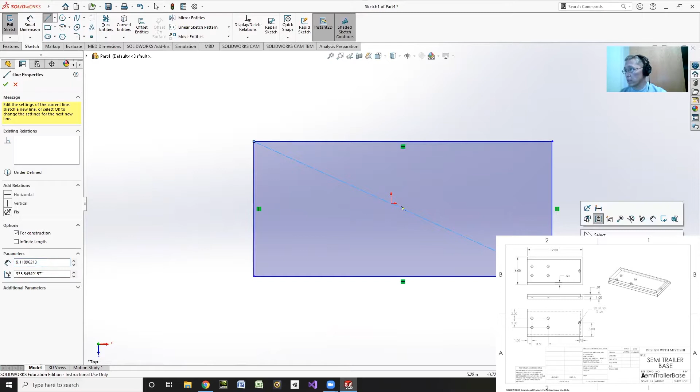Coincident with the corners there. Add a relation between the center line and the origin to midpoint. Hit OK, smart dimension. Dimension this guy here is 6 inches, and this guy here is going to be 12 inches.

Now what we're going to do is go to features, extrude boss base. We're going to extrude this a whole inch, 1 inch, and hit OK. Now I can do this a couple different ways, so I'm going to do it kind of an interesting way.

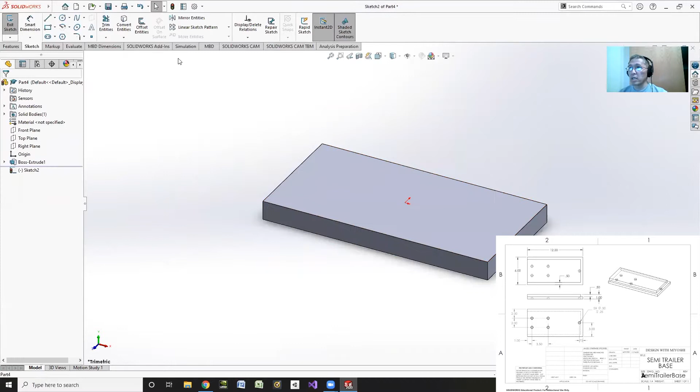We'll do sketch, and I want to put the sketch on the top face. So I'll click on the face, and then I'll just do offset entities. When you do offset entities, I'll do it 0.5, half an inch. When you offset an entity, all you have to do is grab the face, or if you want to...

Actually, we're not going to grab the whole face. We want to grab this edge, and this edge, and this edge. Now notice it put it on the outside. You can just click on reverse, and that flips where it's at, and we'll hit OK.

Now what we're going to do is cut extrude that. So we'll extrude a cut, and we want to grab either that sketch, which is great, but we don't want to go down the whole way - that would be kind of silly. So we're just going to change this distance to 0.5.

If you clicked on it right now, it would cut out the middle. Well, that's not what we want. So I'm going to right click, and we're going to add the feature. Instead of cutting out the inside, we want to flip the side to cut and cut the outside edge. So now you can see it's going to cut out the outside edge. We've got this nice little edge there to work with.

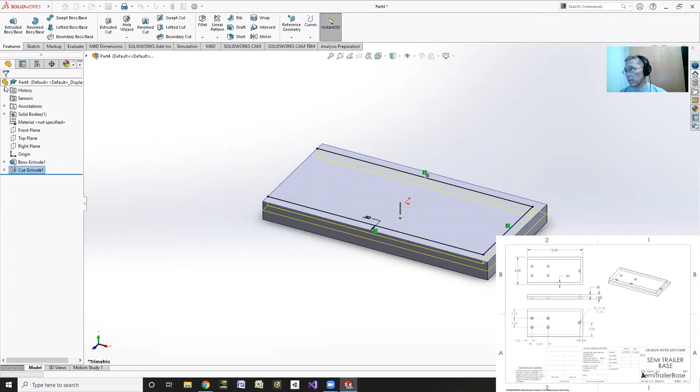So that's almost it. We're going to go ahead and look at the bottom. I'll use my wheel as a middle mouse button and just rotate that guy. I'll hit the control key with the middle mouse button again and drag that over there. And what I'm going to do is go ahead and use the hole wizard and make some holes.

So actually, let's just go ahead and look at the bottom. I'll go to the bottom view, and I'll do - oops, no, I don't need sketch. I'll just go to hole wizard, and I'll grab the same hole that I have been using. That hole, half-inch size is good. Depth 0.25 inches, good. I'll do positions.

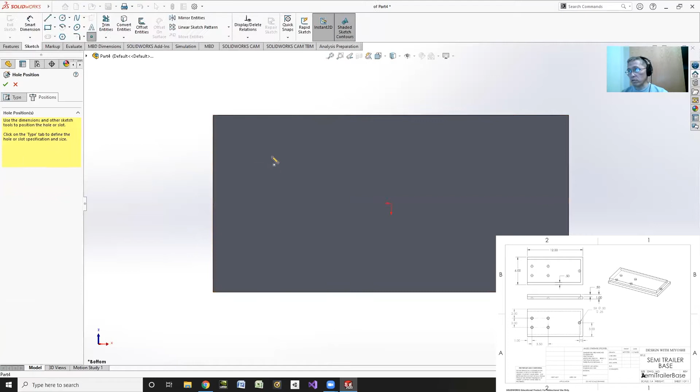Again I've got to grab my face. I'll click on the face, and then I'll just put in 4. Then I'll right-click and select, and then I'll put in some relations. I'll click the centers and make them horizontal. I'll click the center and make them vertical.

And then I'll do some smart dimensioning. I know the distance from here to this edge is 1 inch. I know the distance between this edge and the center is 1.5 from the outside edge of the bottom, which is 2.5 from this edge. Oops, no, it's not. Let's look at the dimensions here. So there's the base of my - that's not what I want.

And then the distance between this center and that center horizontally, that's going to be 2.5, I believe. So let's look and verify that - 2.5 from center to center, that's good. Okay, oops, no, that's not - that's from the center to the axle. So I need it to be 1 inch, 5.5, so that's going to be 4.5 from that edge.

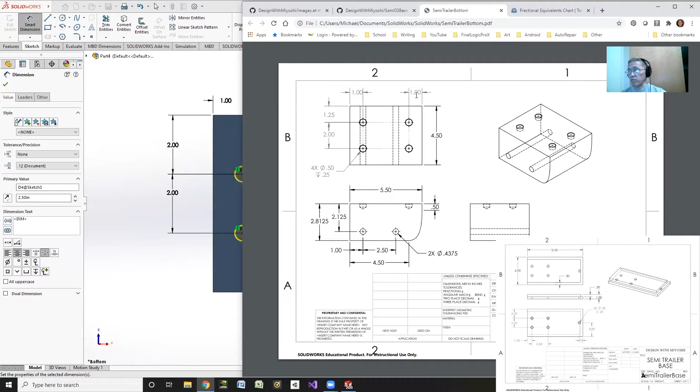So let's do that, instead a different way. I'll just delete that dimension and go from this edge to the center, and that's going to be 4.5 inches. And there's that guy. Now there's one more hole that we need.

So I'm going to make one more hole, and it's the same size hole. So let's go ahead and get out of dimension. I just need one more hole for the same hole. So let's put in - I like to do this way. I don't know why it seems to work.

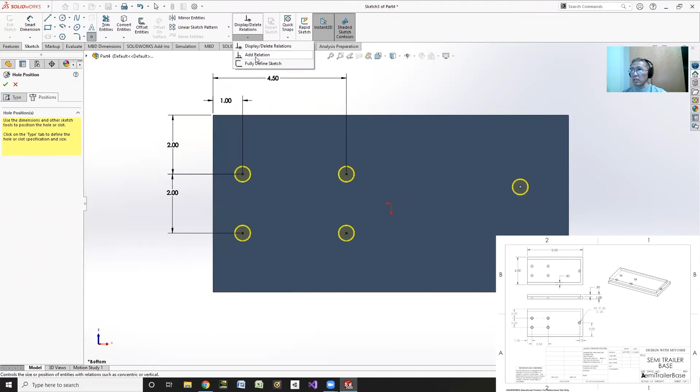I click back on type and click back on position, and it gives me one more hole here. Now add relation - that center is already selected. I grab the origin, make them horizontal. And then the distance from the front edge to the center, we're going to make that 0.75.

And then we'll hit OK. Now I have my 5 holes, so I'm in good shape. Hit OK, and there's my 5 holes for the bottom. Okay, now I really need 2 more holes here, but I haven't really designed that far ahead yet, so I'm just going to go ahead and save this.

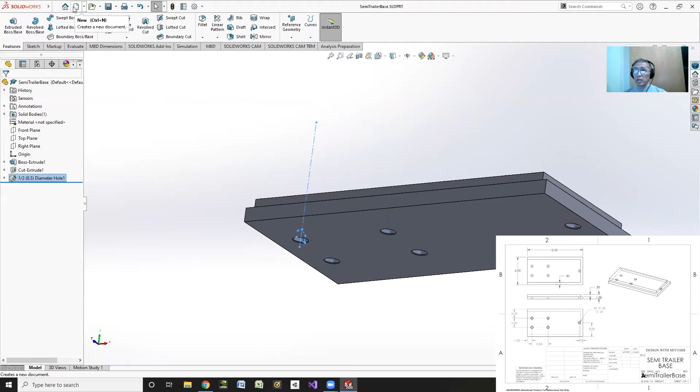So I'll do save. This is trailer base, I'll put semi in the front. Semi trailer base. And of course, I'll do a new drawing, so I'll do file, drawing from part. There's also different ways to do that, but here I'll hit OK.

And again, I like to do drawing, model view, hit the next button. Make sure to create multiple views on the front side. Let's do trimetric on this one. That'll be fine. Hidden lines, use sheet scale, hit OK.

Okay, so now actually I should have used this as the front view. So let's do that. Let's get rid of this view. I'll click on the view and delete it. Yes, and I'll click on the view and delete that view too.

Yes, and I'll just go from this view and go to projected view. I'll just click on the view. And that view's fine.

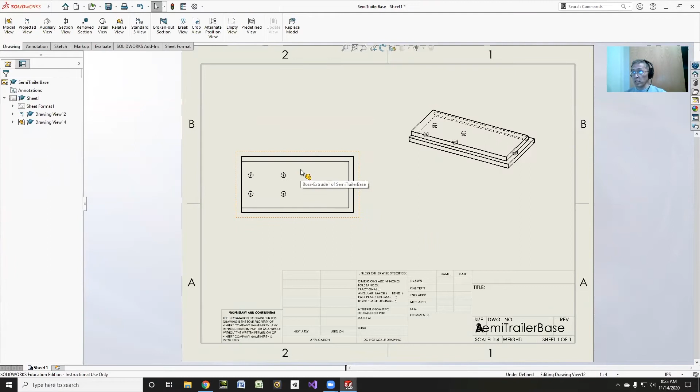So actually, let's do this. Let's go back, let's go back. I don't like to use Control Z very often. Oopsie, but I'm going to use Control Z. Let's get that back. So instead, I don't need this view, so I'll leave it there for now, just in case.

I'm going to go ahead and make one from the bottom view. Let's go ahead and make one more view, projected view from the bottom. Click on the view I want to project from. And there it is, so that puts these guys where they belong.

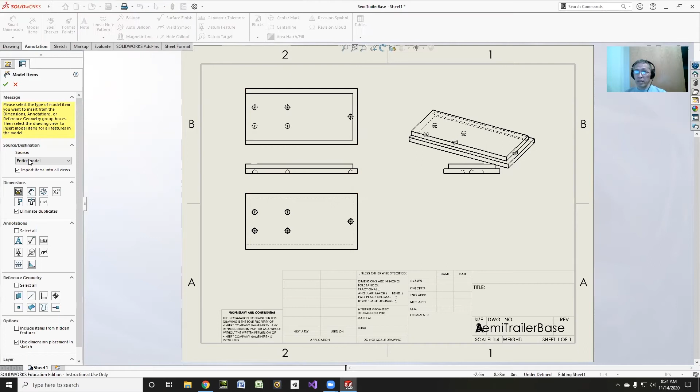I'll bring these guys out, the 1 and the 0.5. Good, and that endpoint's there, so I'll bring it out to the end so I can have a gap. That looks all right. And then, of course, now all we need to do is put in my dimensions for my holes.

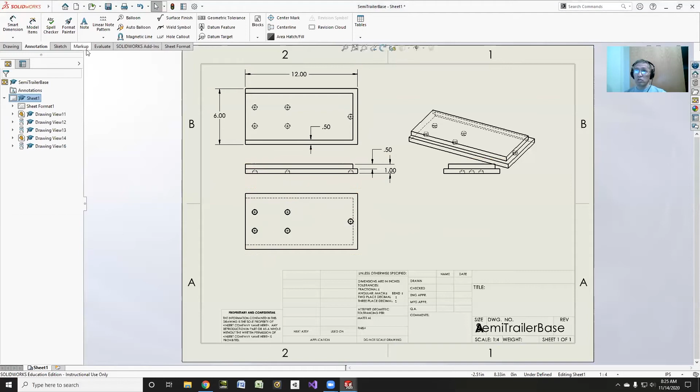So with smart dimension, I'll zoom in here for the hole. These are all the same height and the same depth, so I'll just do this here. That's 0.5, and I'll put 5x in front, 5x space, and I enter and do the depth of 0.25. And then I hit OK.

Zoom in, or zoom out rather. That looks good. Then I'll just dimension where the holes are. So, oops, let's do one other thing here. Do sketch, and we'll make some center lines first.

So before we do the smart dimension, I'll grab the corner, or that endpoint there, right click end chain, endpoint there, right click end chain, endpoint, right click end chain, endpoint, right click, and select.

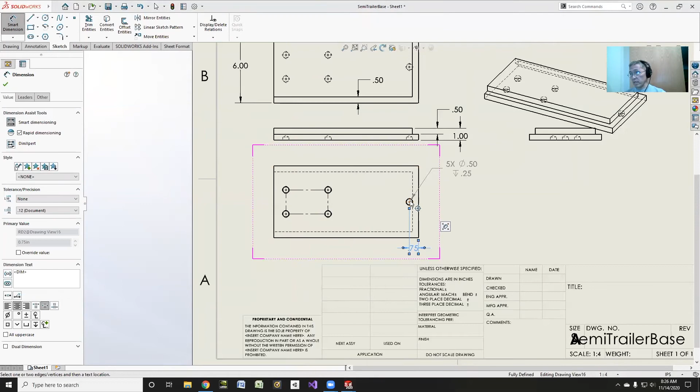Okay, I'm gonna just dimension to there, so let's just smart dimension. We'll grab the, we'll put it in like that. So there we go, hit delete. 0.75 there, and even though we know this is center, we'll grab the center, or lined up with the origin. Oops, I didn't like that.

Zoom in a little bit here. I'll just grab the center. No, I didn't like that. All right, go back to my dimension, grab that line there, and we'll go there.

That looks good, and then we'll zoom out. And then, of course, we'll do from the edge to the edge. We'll do, yeah, that's okay. There, okay, that's okay, and from that edge to that. Oops, no.

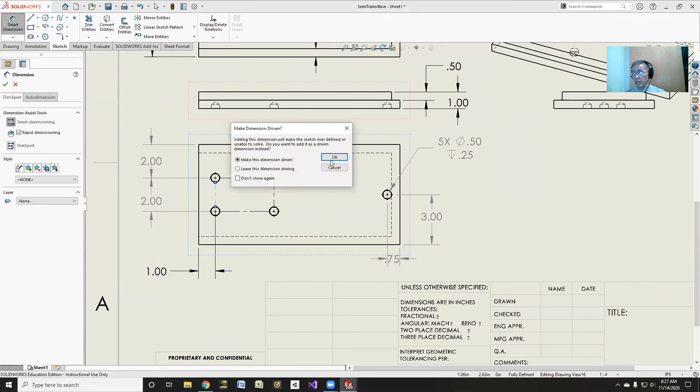There to there, no, right to the bottom too. Bring it out there, yeah, that's fine. And last but not least, we'll enter from there to there. And I hit okay, now I'll probably move that up a little bit.

There we go, yeah, let's move it the other way. There we go, right, that looks like I've got everything. Got dimensions for my holes, got hole placement, hole placement, hole placement. And there we have it.

These dimension arrows are a little off, so let's bring this up here. Even though, actually, let's do this, let's make them on the inside. So let's click on that.

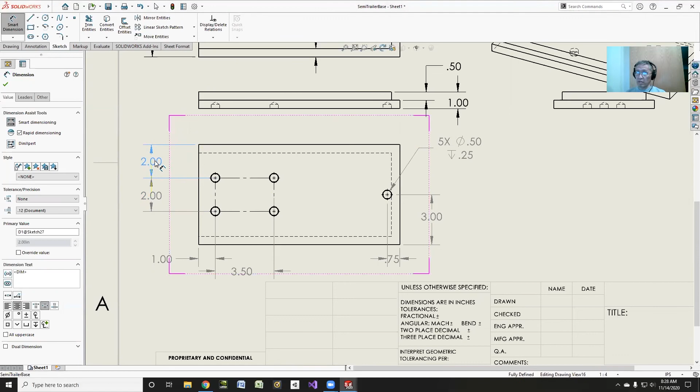It's on the inside, and we'll pull that guy on the inside. Bring that on the inside as well. Just tiny arrow, tiny lines from this arrowhead, so that'll be okay. And that was good.

So I'll bring this guy in a little bit more, beautiful. And let's get rid of this view, that's not necessary. Oops, smart dimension. Click on that view, we don't need it. We've got all our dimensions, everything's beautiful. So there's our drawing.

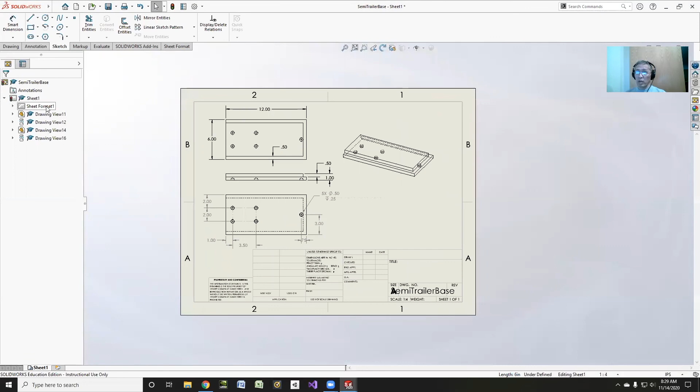We'll go ahead and, oops, control. Let's move this over there for more. Right click sheet format, edit sheet format. Zoom in here to the title, and I'll put my name, all caps, and date.

And then I'll change it to 14. Click on here, and this is trailer base. Base. There we go, click that over there.

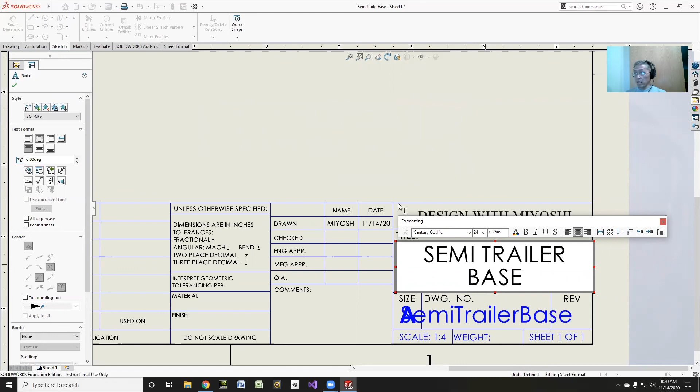Right click on sheet. Oops. Right click on sheet format, edit sheet, zoom out again. We don't really need to zoom out, but that's okay. Let's save, it's a good name. Save. Save this guy as PDF.

There we have it, the semi-trailer base. And again, I do need to add a couple more holes in this top face, right over in this area, but I am not going to do that yet because I'm not ready to. I haven't figured out the whole design yet.